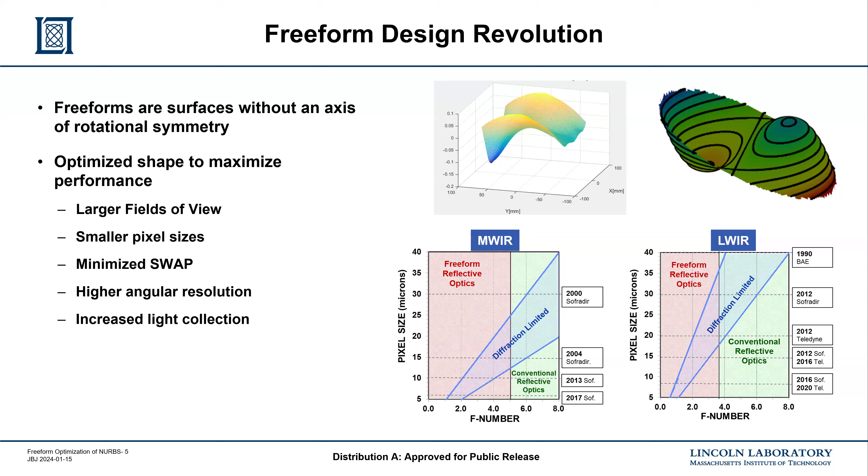So getting to the point of using freeforms requires solving three big challenges. The first, and I won't put these in any specific order because they all have to be solved simultaneously to produce a freeform object, but I'll start with the design because that's usually the first thing that gets done in an optical system anyway.

You need a way of describing what a freeform is. You need a way of translating that into the computer code to actually optimize it. There are too many parameters to do this by hand.

And you then need a way to be able to take that design and actually translate it out to something that's usable by the fabrication tool. You've got to take those surface shapes. These have lost all their symmetry, so your equations get a little messy here.

And now you have to be able to have a machine that can actually create those shapes. So you need to add axes, you need to add encoders, you need to be able to add precision to your tool motion and have the pathing in the tool motion, and know where the pathing is, both in pressure and in stroke speed, all of the fun things you learn working in a polishing shop when you do it by hand, now able to do it over a computer numerically controlled system.

Great, we've got 5-axis machines, we've got 6-axis machines. You could buy 8-axis machines if you want to. Great, we can now fabricate really crazy shapes. You still have to be able to measure them because you have to take those measurements of the surface and then feed it back into the machine. And once you've fed it back into the machine, you know you actually did it right. And then you have to be able to put together your optical system.

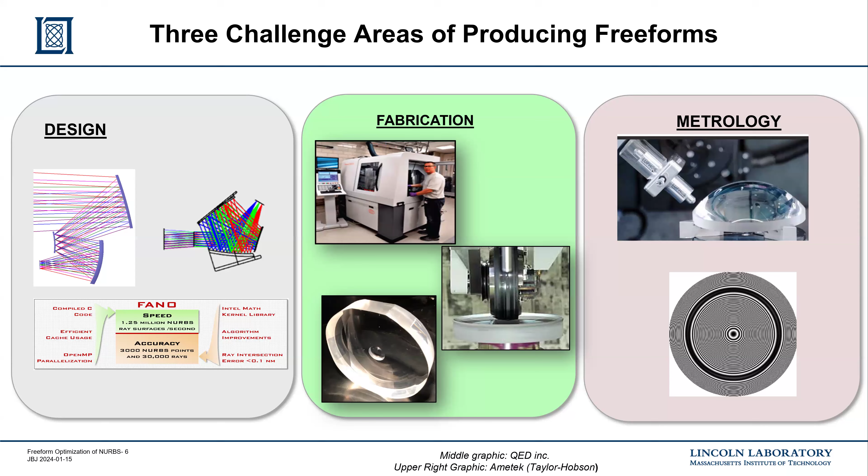Yes, freeforms have been out there. You can find patents of them out and back in the 80s, but it was very hard to fabricate and very, very hard to align, except in really small, limited use cases.

We'll flash through this really quickly. This is kind of how it goes, right? You've got Newton back in the 1600s, great. You get to the parabola, beautiful, perfect spot. Even Newton really didn't have great parabolic telescopes. They were hard to manufacture, right? It took several hundred years to be able to manufacture good parabolas, good conics, good ellipses.

And then the 80s, great, we've got computers now that are doing stuff fast enough, we can start having them drive machines. It means we can start adding more terms, the optimizers can get better. You've gone from a couple of parameters with a kind of constant radius curvature. Now you've got 10 or so parameters per surface. Well, computers now, they're so much better, we can start adding as many parameters as we want, within the limits of whatever the latest Intel CPU is.

And that means we can start having hundreds of open parameters running on the surface to bend and change and shape the mirrors, which means we need equations that can accommodate many, many more terms that are there.

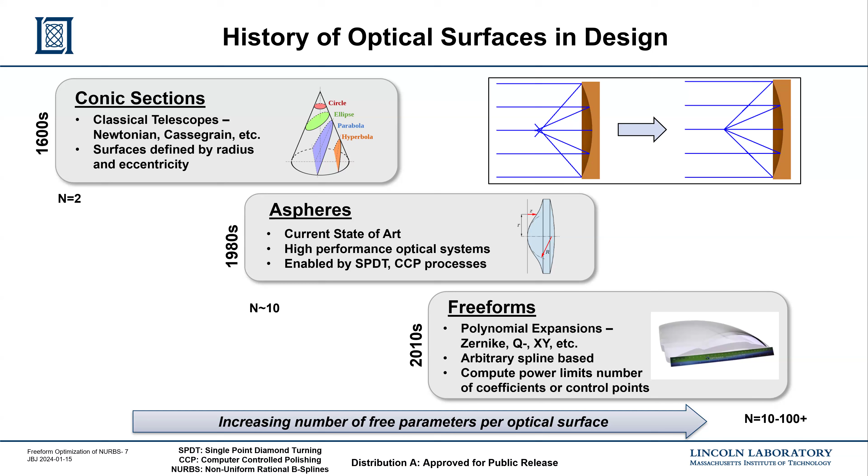So aspheres, I won't spend too long on this. The idea that you've got your core conic equation, your radius curvature, your semi-diameters, and a function that we think of as the base conic, and then we start adding higher order perturbations to the surface, which adds just a little bit of localized bending.

It does become a little degenerate in these descriptions, which is why things like Forbes polynomials, the Q polynomials have come about, so that you don't have terms that start fighting each other while you're optimizing. You don't want to be increasing this number and then finding you have to be tweaking other numbers. It does add some simplicity to the optimization method.

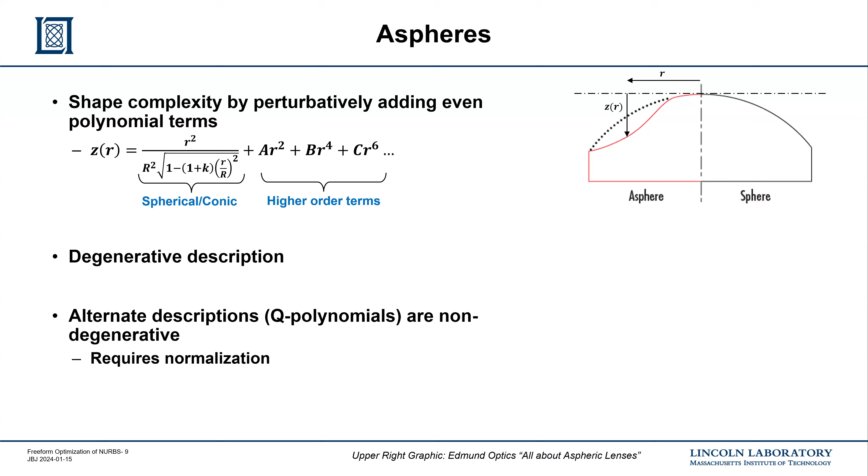And then we get back into the idea of freeforms. Now, what a freeform is, is a little bit contentious. You can ask many people and you get different answers on what exactly constitutes a freeform. There's really two definitions you can select from. The first is there's no axis of rotational symmetry. That one nobody will disagree with. There's a softer definition, I call it a softer definition because you can argue one way or the other, and that is parts that don't have any local axis of rotational symmetry.

I personally argue things like off-axis parabolas that are made without a parent. Instead of making a giant 4-meter off-axis parabola and then coring it out together, you just make it as one little 12-inch off-axis parabola. Everything about making that off-axis parabola as a child on its own uses the exact same processes, tools, and math that a freeform does. It's essentially a freeform altogether.

And we've got many different ways of describing it. You've got your polynomials, you can describe it purely in terms of point clouds, and then this way that Lincoln really works with, splines and NURBS.

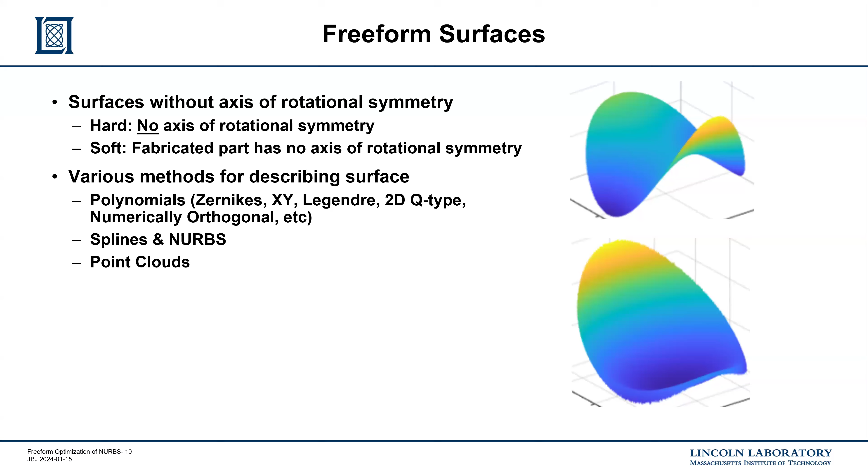So what is really the difference between point clouds? And I'm lumping NURBS and splines in with point clouds, versus polynomials. Polynomials are essentially an analytic equation, a solvable analytic equation. If you enter in an XY coordinate on your mirror, you get a set result. This is great, but that means that when you're optimizing, if you change one term on the mirror, the entire surface shape changes.

So at some point, you get so many terms there, when you open up to more complex surface shapes, small changes mean your entire surface deforms. And now the optimizer actually starts fighting against itself because it wants the mirror to be in position A, but it needs a little more correction in this one small spot over here. And to get it, it has to tweak the entire equation to bring that point down and keep the same spot there.

The nice thing is, if it's a fairly mild surface, you only need a couple of terms. You can do the job very simply. And with everything being orthogonal, it makes everything very easy to describe. You've got a center point on the mirror, you can define your equation from that center point and everything works.

Coordinate transforms can be very easy. And describing that overall shape when you're done, you can put it in a drawing, it's easy to put it in terms that manufacturing and metrology can understand.

Point clouds are a completely different beast. This is where they really work, the idea that instead of changing the entire surface shape, let's just change the localized points. Let's lay a grid down on the surface, describe that, find a way of describing the points in between the main control points that are on the surface, and push and pull up and down locally on it. Keeping the surface continuous, which means it has to be second order differentiable. We have to keep it smooth. We don't tend to like jaggedy optics.

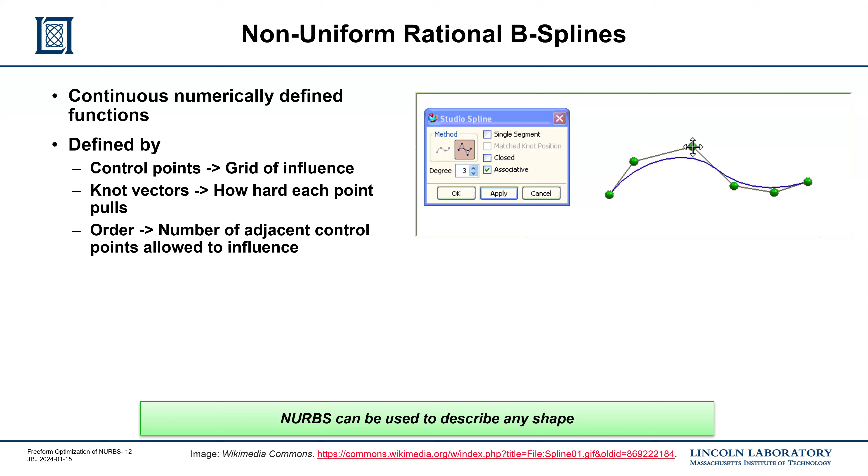And that becomes a big factor with NURBS optimization for raytracing. Ultimately NURBS describe every shape. It's not limited by terms, it's just limited by point cloud density. So we can get to really, really fancy shapes just by manipulating a certain set of properties, and do it faster in many ways than polynomials can for complex systems.

So back a little over a decade now, Michael Crisp, who is still a senior staff member here at the lab, recently mostly retired, developed a method for describing NURBS-based optimization called FANO. You'll hear this a lot, but the acronym doesn't really matter. I think it changes every couple of years when somebody can't remember what it stands for and comes up with something new. FANO is a way of taking an optical system, converting all of the surface shapes to NURBS in a kind of internal global coordinate frame, and uniquely ray tracing. It's a full ray tracing engine, custom designed to then optimize the ideal surface shapes that are in there.

We've spent a couple of years developing a direct GUI connection to Zemax. So we can open it up, it'll take a Zemax file, convert it into the FANO language, spit out a FANO design file that we can then optimize against and iterate in different parameter sets to try and get truly the best shape possible. Then we can actually take it and feed it back into Zemax or Code V to do all of the analysis. That's the nice thing about the API, is that we don't have to build any of the analysis tools in FANO. They already exist in Zemax. Why would we redo what's there?

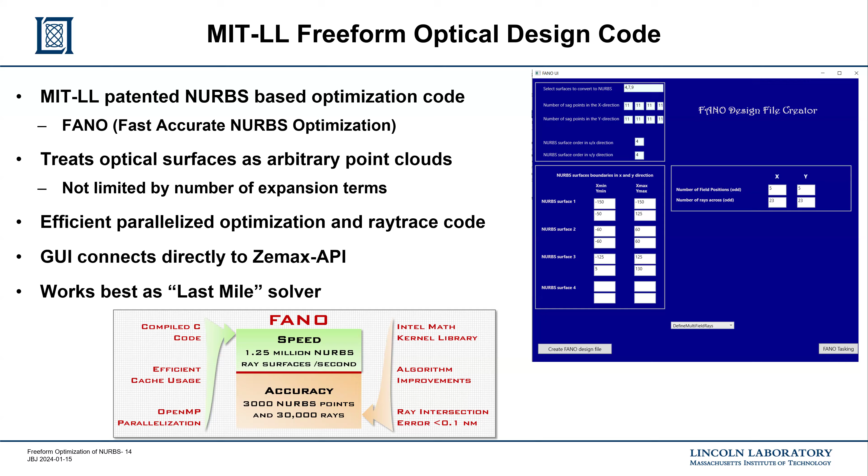Can Zemax ray trace a NURBS surface? Doesn't it need a polynomial? You can enter it as what they call a grid sag surface, so Zemax can trace a third order spline. So it's not a true NURBS. NURBS lets us do some shifting of the points. So FANO will actually re-register and reinterpolate the points back to something that a third order spline will be able to correctly attribute to the surface.

So Lincoln was kind enough a few years back to actually create a video of the FANO process. Let's see, one just here. The idea being you can keep it somewhat real time.

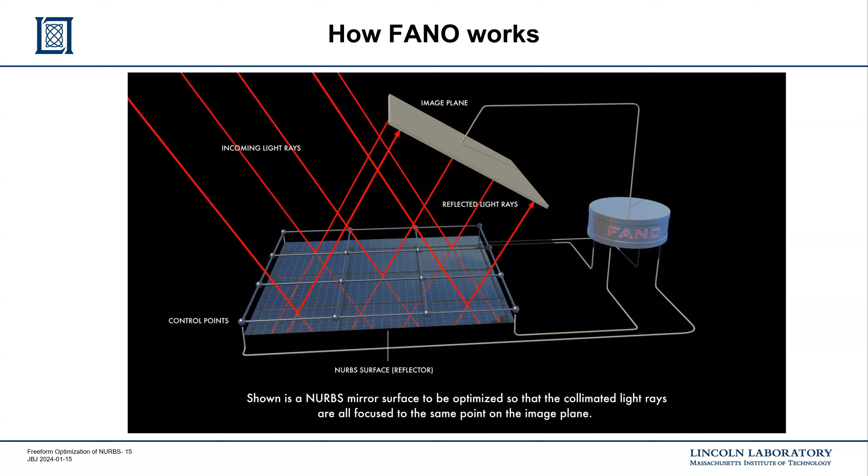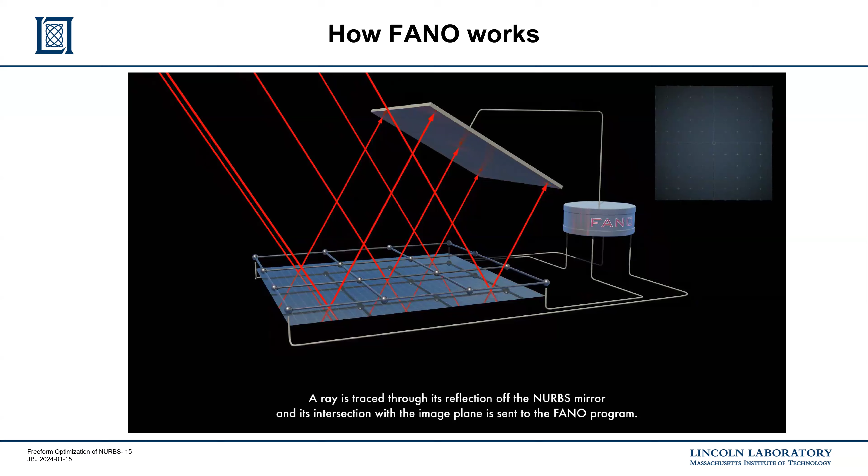You've got your surface, and this is starting flat -- we barely ever start true flats. So your image plane up here has a variety of rays looking at the control points and the FANO solver. FANO goes in, kind of iterates around, figures out how each of those control points influences the rays, and then it starts looking at how to minimize their overall RMS spot size in a sort of direct way where you can see how each control point influences the overall control function for optimization.

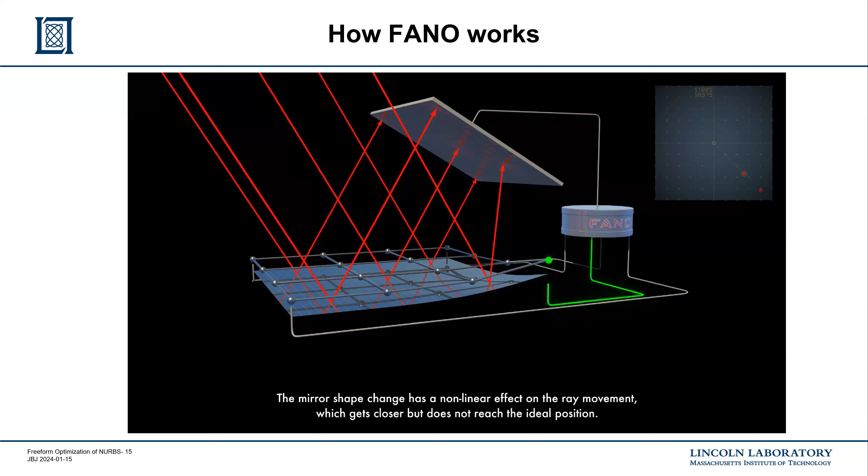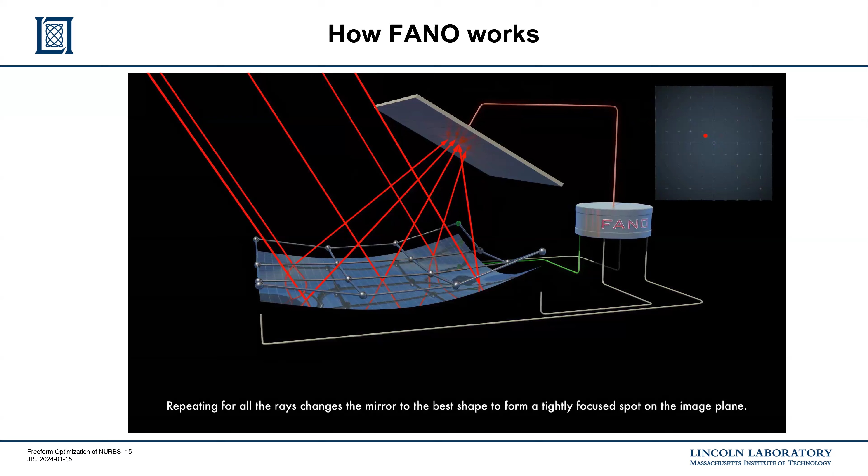I have a question: is the software optimizing the grid density, or is that something defined by the user prior to the analysis? It's very much defined by the user prior to the analysis, and it's part of the art of working with the software that you have to have a density on the surface. You have to at least know where you're starting, because NURBS, where your control point is defined both locally and how hard it's pulling, you just at least give it a basis to start working with.

Adding points is easier to do manually than -- is it always a uniform grid, or do you do non-uniform? You can do non-uniform. There are different user settings we can make while going through the optimization. Uniform grid actually tends to work pretty well, so technically it is a third order spline when the grid is uniform. From experience, it's worked pretty well. There are a couple cases where the non-uniformity can help.

So with that, Michael developed what we call the Freeform demonstrator, which you can see right there. This is his original design to show the power of freeform surfaces, particularly NURBS surfaces. So this is not looking at Zernikes or XY polynomials, this is looking at how NURBS do.

Compared to aspheres, you've got an f2 telescope with a 6 degree by 6 degree square field of view. The conventional aspheric terms out to the 14th order give about a 28 to 30 micron-ish spot size in the visible. You convert all of those surfaces over to NURBS.

You can see the different sampling grids there. Primary is a little more densely sampled than the secondary, same with the tertiary. You get an almost 6x reduction in your spot size. Same telescope volume virtually - I mean a little bit different, but essentially same telescope size, same first order performance, big increase in optical performance.

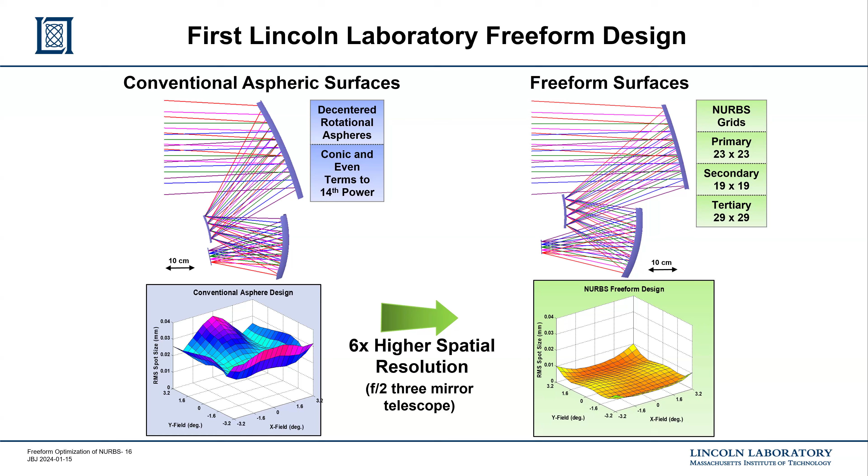So, something about what it's like to align this and actually assemble this - I will get to that. You're telling me it's useful, but now I'm anticipating that it's much more difficult to really assemble. I will definitely make sure I save time for that, because that's actually some of the most interesting stuff we've been doing the last few years.

Demonstrator, as I say, you can see it up there. Most of this is aluminum, nickel-plated mirrors and aluminum housing.

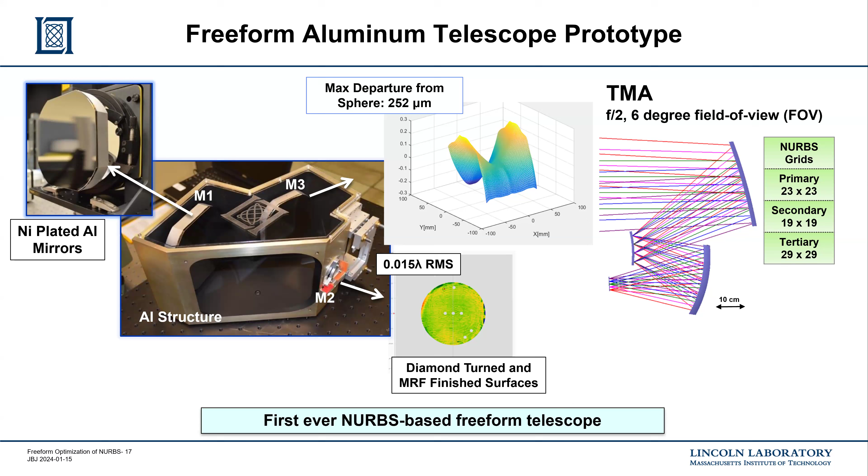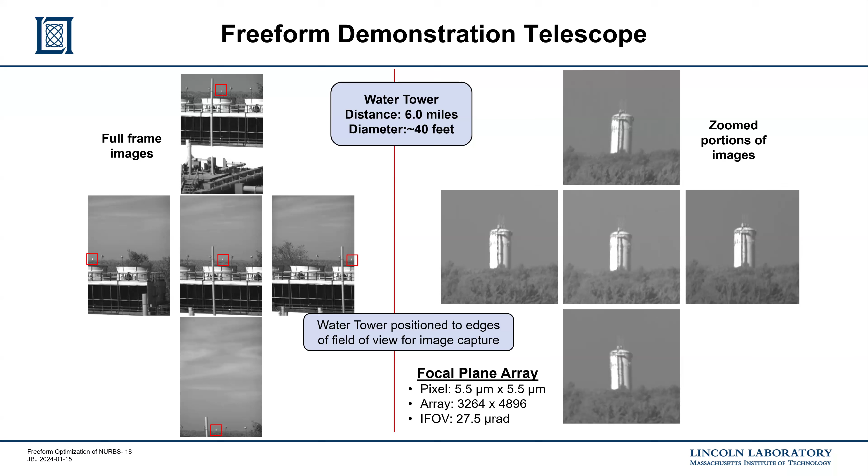So working with Fano, it's kind of about the parameters. Fano's kind of a unique beast to work with. There are a couple strong rules we've developed over the years that you really have to be aware of when you're thinking about designing systems in there.

First is that a lot of parameters are hard to trace. So right now Fano is at least enforcing bilateral symmetry, meaning you've got to have parity left to right. That means we only have to trace half the rays - if it's symmetric left to right, you just say the NURBS surface is going to be the same on the left side as the right side, and you just worry about the half that's there.

You've got this issue of ray aiming. This is a problem with every commercial code - they always struggle if your stop is buried in the back. Code V and Zemax deal with it different ways. We have kind of the same problem because it's homebrew code, we can't really deal with some of the complexities. So we need an entrance pupil somewhere we can directly fire into to make it work. That does kind of limit some of the systems we can do, but even this one, the secondary's at the stop, so we've got tricks we can play to force that entrance pupil out to the front of the system.

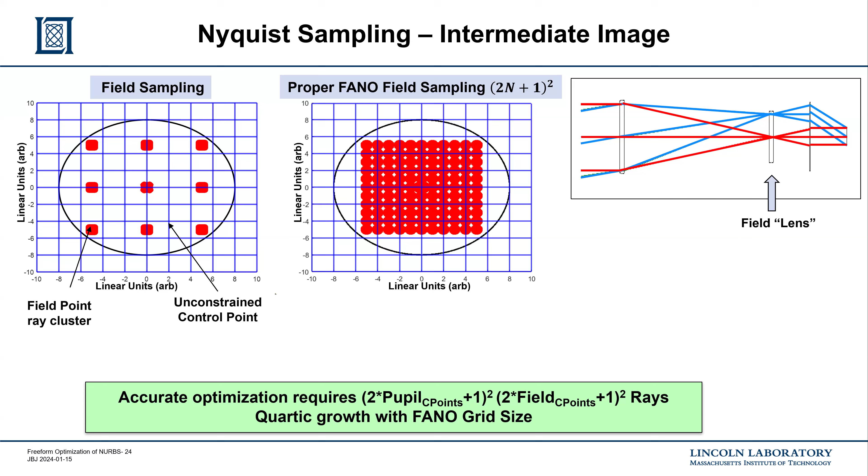So you have to oversample the field to make sure that you've got 2n+1 field points per control point at those surfaces. So you have to really know what's going on in your system, which optics are at field, essentially intermediate images, which ones are at pupils, and which ones are the in-between, and figure out how to balance enough field points to pupil rays in the system. This essentially leads to a quartic growth in the number of rays you have to essentially chase within Fano. So we're tracing a lot of open parameters, we're tracing a lot of rays. It can take a little while, but when it lands on a solution, it's going to be better than anything else that's out there.

I also want to mention boundary conditions, right? Your mirror has a finite size. Your clear aperture cuts off somewhere. No mirror runs to infinity. So we tend to like to trace rays out to the edge of our clear aperture. Great, but again, you run into this ringing effect that's there when you're past that clear aperture.

The other thing is, remember, all of your NURBS points with orders higher than 1 rely on the adjacent points to define the shape, right? The adjacent points are also pushing and pulling on that shape, which means that if you have a control point outside of there, it's going to be affecting the control point that you do want to be working with. So you run into this fact that you start seeing ringing, you start seeing edge ripple, you start seeing bad fits right at the edge of your clear aperture because you don't have rays at that next adjacent control point to tell, hey, that next control point, I need you here so that the control point I really do care about is in the right position. It's one of the limitations of working with NURBS, that the system works on the whole, and you have to understand that sort of interplay between adjacent local optimization points that are in there.

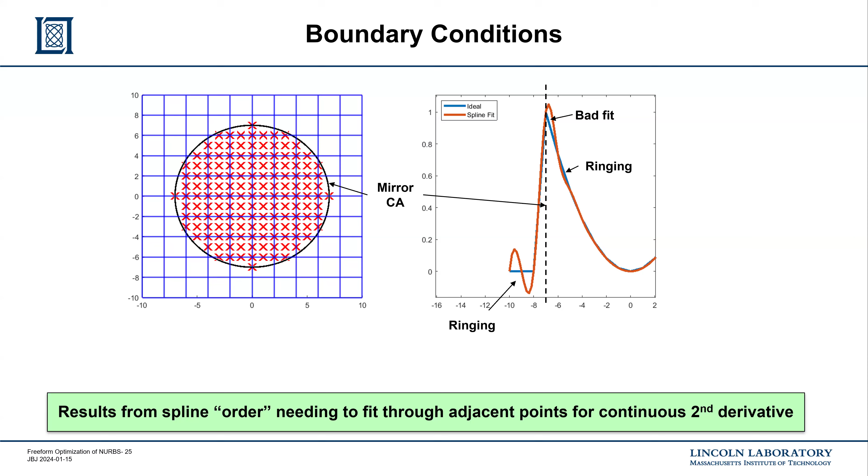We spend a lot of time actually, this is where the art really is. It's figuring out how to balance a lot of these different parameters and understanding that you have to extend how far you have to trace. We have to oversize the system. We have to trace bigger pupils. We have to trace bigger fields. That way we make sure we have rays outside of the control points to control the control points that do lie outside of the mirror, but we want to be able to then achieve much, much better fits to the ideal surface at the point. And then we can just slab the mirror to where we want it, right? Those control points don't exist in the real world because they're outside the clear aperture. So we can optimize to it and then just cut it to where it needs to be.

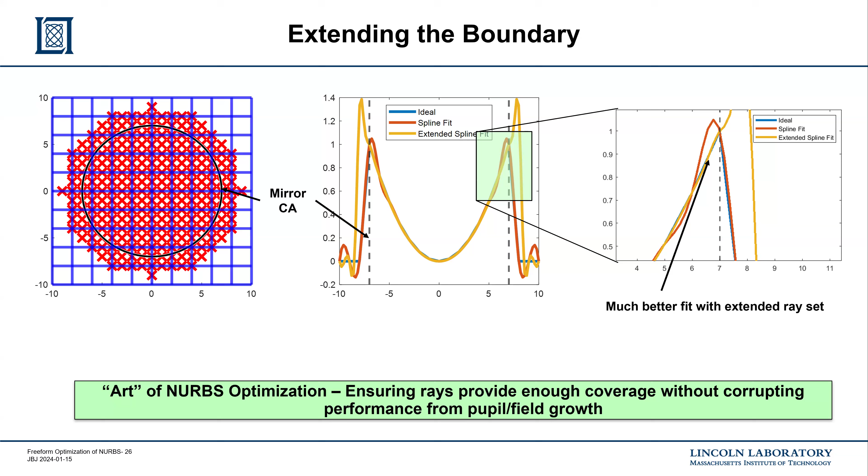All right, so now we're going to get into the practical bit. We've done imaging systems, but I'm really interested in afocal systems. We've got a variety of parameters we're used to chasing when we optimize, generally spot size or wavefront error. We also tend to have a fixed focal length or field of view you're working with.

Afocal works a little differently. You're chasing collimation. You want the flattest wavefront you possibly can for a given field point. And there's usually a magnification factor in there too - how big or small you're making it, how much your angular distribution on the input versus output will be. There's a secondary target you tend to chase in afocal systems, and that's exit pupil. In a lot of cases, you want a physical accessible exit pupil or entrance pupil in the system. This is the exit pupil, because interesting things get put behind it.

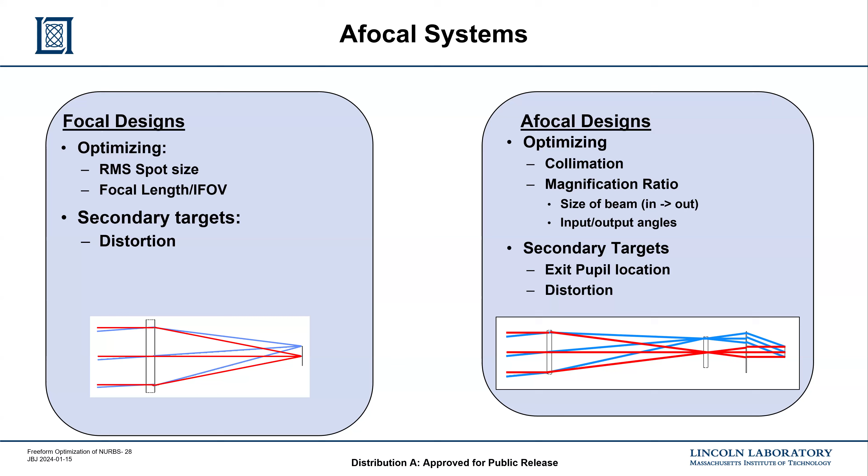The basic first order equations - the real advantage here, and remember, Lincoln is interested in prototypes. We want to build prototypes. With an afocal system, to create an image, you just put an imaging lens at that exit pupil to your camera. But that means now you don't need a prototype system this big to get access to an aperture this big.

You don't have to build a system that is giant to be able to prototype it anymore. If you have a common afocal design with a really nice, well-controlled exit pupil, you could do a lot of really interesting development work and gain advantages of those sort of bigger systems.

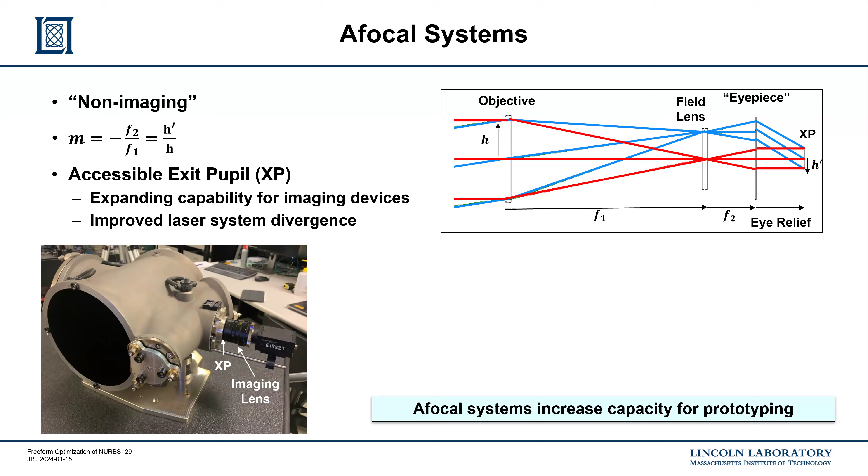However, teaching Fano to go from imaging to non-imaging, that took us a little bit of time to really lock down. The solution proved really simple, but it wasn't really straightforward. We had to work with Michael for a good 6 months to come up with this.

Fano, like most software, chases spot - your X, Y, Z for a given spot. You don't usually worry about Z because it's on an image plane. They all tend to, if it's a flat image plane, have the same Z value. So really it's just trying to minimize your RMS value for a given spot.

But all ray tracing software also tracks what we call direction cosines. These are effectively the angles that the rays are moving through the system. To be able to trace a ray, you need both its position and the angle it's moving, and then the distance it's going to hop to the next move.

So we can look in terms of direction cosines, which the Ray optimizer is already tracking. It's part of the Ray database, and you can pull this down from the database, and Zemax also has this in their optimizers for people to view. Then we can just take that same equation, replace the terms from linear to angular, and try to minimize that RMS value.

This is functional with Zemax and in their engines when you flip on afocal mode, or whatever the afocal system description is there. So we managed to convert the engine to let us switch between imaging and afocal to start doing more of these prototyping, universalish sort of concepts.

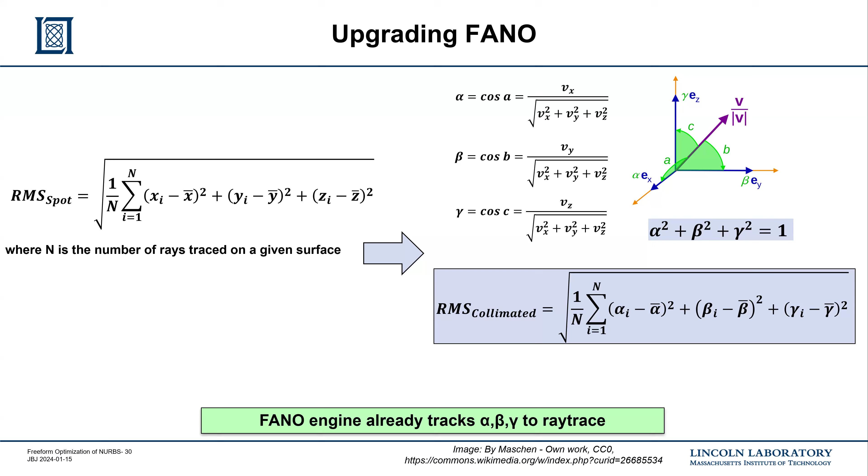And that's where we get to building our next gen freeform telescope, which sadly I couldn't bring today, but we wanted to show what we could do in this sort of afocal space.

So we set out with a concept task to see if we could come up with a plus or minus 2 degree field of view system - so a 4 degree circular field of view telescope with a 6-inch, 150 millimeter entrance pupil and a 6x magnification. And how low a wavefront could we possibly achieve using our sort of NURBS shape?

So we had a notional volume we wanted to be in and a notional weight we wanted to target, but really, again, accessible exit pupil - can we get it to go from 150 down to roughly 1 inch in the back? And maintain a really large field of view.

Remember, most afocal systems are plus or minus half a degree. They won't even stay diffraction limited above that. You can get them to 1 degree, but they're not really high performance out of that plus or minus 1 degree range. So really, how far can we push it and maintain really exquisite performance?

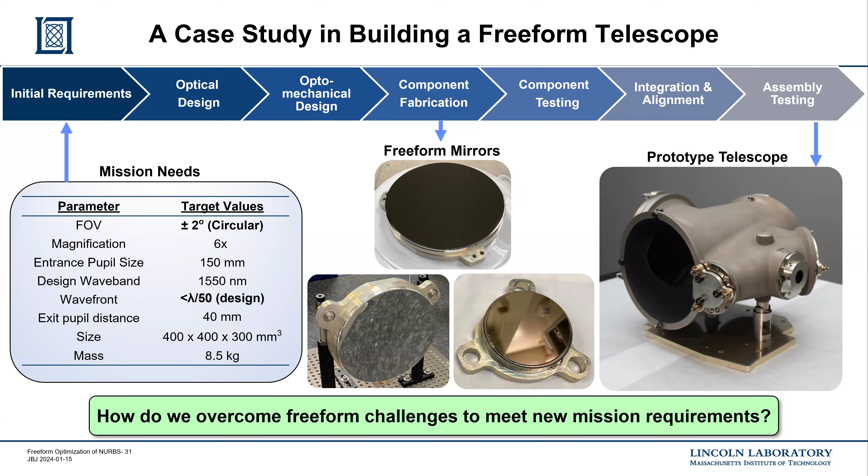So remember, Fano is a last mile solver, so we have to get an initial design. It's not going to know what to do.

Personally, I'm very interested in these ideas of folded TMAs - three mirror anastigmats, where you've got a primary, a secondary, and a tertiary mirror, but you fold it so that it makes this volume more compact because you're essentially running the rays inside the space that's in there. This has been done. There are designs out there, legacy telescopes running with this sort of design concept.

Search all through the literature and find various concepts out there. One of the beauties is you get this nice accessible exit pupil. You can even, if you do it very carefully, though it's hard with systems this fast, get an intermediate image that's accessible, so you can do a really nice field stop to cut down stray light. Doesn't always work when you're going for compact, but it's there.

You'll notice though that the all-asphere design, it's really hard for this sort of field of view, this magnification, this entrance pupil size, to get below about 0.2 of a wave RMS at 1550. So we've got to do better.

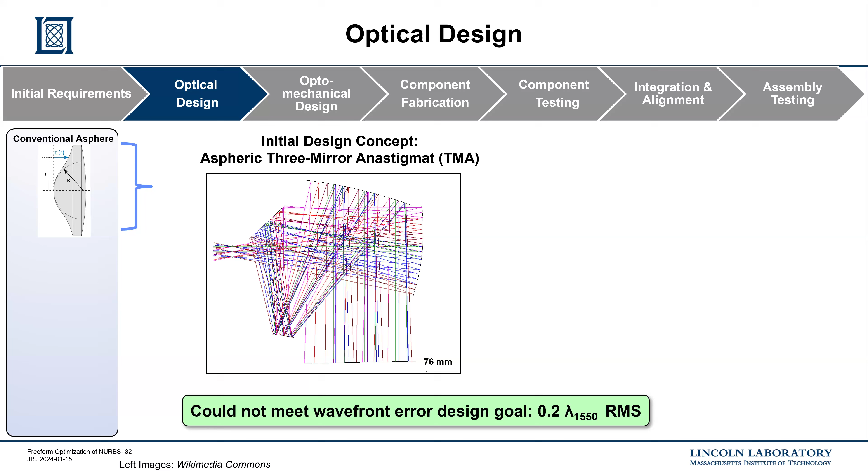Let's go to Zernikes. We can take that design, add Zernikes to all of those aspheres, go back in, re-optimize, select code 5, let Zemax just churn, try to find a really great solution. It's a lot better - good 5 times better than what the all-asphere design was.

We've got a couple high lobes through there, but it's really not getting down to that. Ideally, we want to be starting around a 50th of a wave. So when we start building a system, it's going to be fairly low performance.

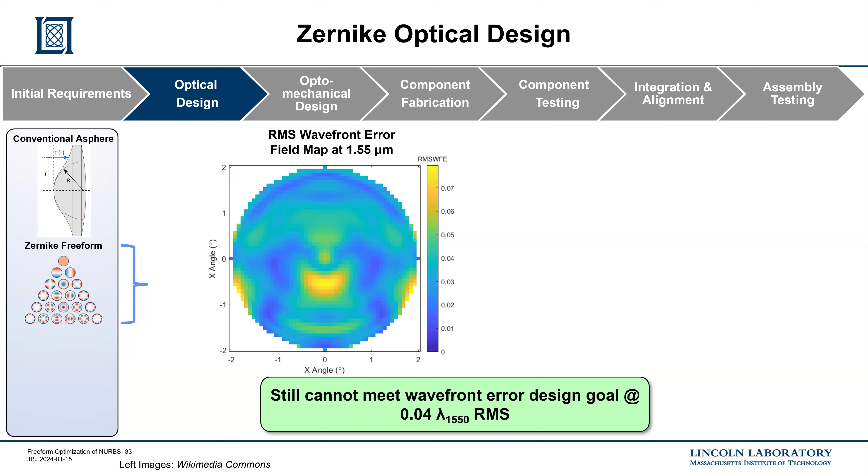So we can convert that now to NURBS, and you can see the difference. I'm going to flip between these two slides here so you can really see - these are on the same scale, right? You can see how much less wavefront error there is across the system.

It still has that folded TMA appearance. The mirrors have not shifted dramatically from more or less where they started, but now we're talking half the performance of what the Zernike was across the field of view. This is less than a 50th of a wave over 97% of the field of view we're talking about.

That's the residual, right? That's where we're starting. So that gives us a lot more buffer to be working with. We have a lot more room to work with when it comes to tolerancing, aligning, and building.

There are a couple papers out there that the lab has published where we talk about the benefits of NURBS versus Zernike versus just asphere. We do tend to find that freeforms are less sensitive than aspheres are in general.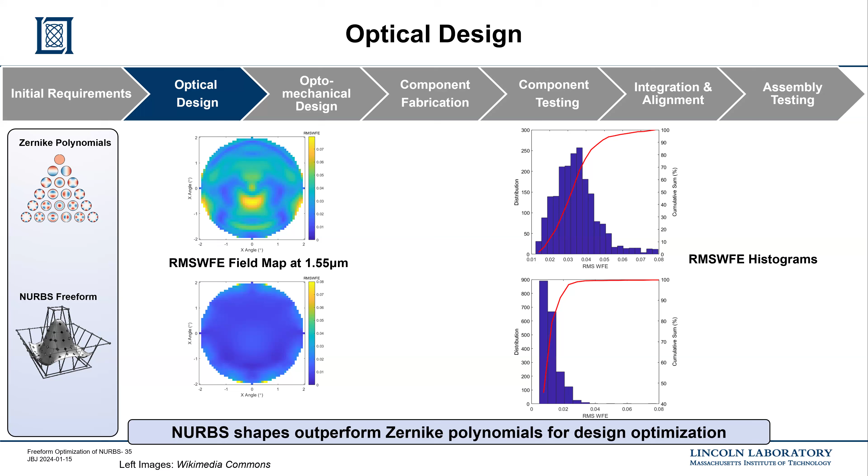So now we've got our design. We've got to figure out how we're going to actually make it, because our sponsor's like, no, we want you to go and actually build and prototype it. Great, we want to build prototypes. That's what we want to do.

So this is where myself and Chris Roll, who's in the audience here, sat down to figure out how we take a really, really beautiful NURBS point cloud design and make it something real. You've got problems, right? We can't do a lot of in-house code.

This is a small rapid prototype program. So we've got to think about how we get the shapes into CAD, how we spread them in CAD, how we get the prescription to line up to datums on mirrors, how we get them to translate so we can convert it to MRF codes, or both MRF code and diamond turning codes, so that the machine knows how to make the shapes. Since we're not talking about polynomials, these aren't embedded descriptors in the normal CAM software that the machines are using. And then, of course, the same problem getting into the metrology - how do we do it for metrology?

The biggest challenge with freeforms is coordinate frames. I will harp on this the rest of the night. Coordinate frames, they are the hardest thing we deal with.

Chris and I have spent so many hours in meetings discussing where on earth the coordinate frames sit, because the mirrors are all in local coordinate frames. They don't care about global datums. To build a system, though, you need a global datum somewhere. You have to say this is the truth, and the local coordinate frames also where the surface is, not where the mirror is, like the physical mirror is.

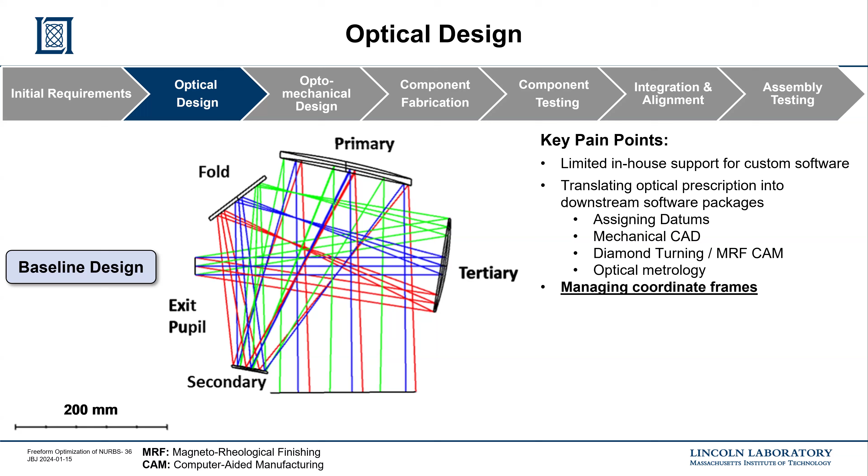So coordinate frames become a real hassle, and a lot of time is spent developing ways of describing them and making sure that they translate and travel properly, and you don't lose fidelity as you have to switch from one global coordinate frame or one local coordinate frame to another. Every time you interpolate, you risk degrading the quality of your system.

Chris did a fabulous job with this optomechanical design. We've got our mirrors, the aluminum with nickel plated surfaces, and our sort of contoured housing that we came up with. And then we started thinking about how do we do this right.

Part of working with freeforms is you need a lot of really good fiducials. You can never have enough fiducials in your system. If you want to measure something, it's got to be put in before it's actually manufactured. So if you do too many, not a problem, you probably won't use it, but fine. If you really end up needing something, you don't want to end up needing it after it's made and you can't have it.

So the mirrors all have precision clocking features. They've got precision mounting points. We have places where we can manipulate each one in 6 degrees of freedom. We also include features like pockets in the back of the mirror where we can mount SMRs so that we can see relative to a CMM or a laser tracker where the mirrors sit.

We also take advantage of another technology developed at the lab, something called the ARRK mount, the adjustable relocking ruggedized kinematic actuator. This is a little piece of technology developed at the lab 3 or 4 years back that is a vibration and sag insensitive actuator. It has a way for us to quickly unlatch the system and be able to turn it like a normal Newport or Thorlabs, Mitutoyo type actuator system to make very precision measurements.

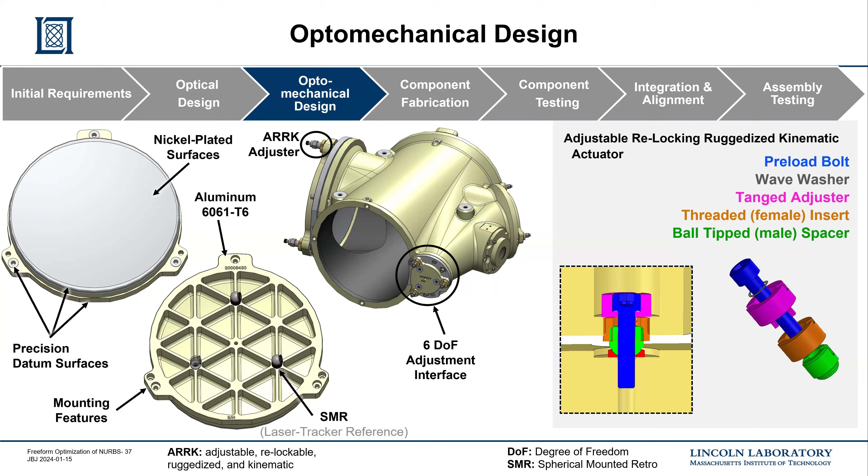Everything was fabbed in-house, except for the 3D printed housing. Mirrors start off rough, they go into diamond turning, then they get essentially iterated on over there in our diamond turning facility.

Again, data interpolation, big issue, right? How do you translate the point clouds from the NURBS space to the CAD space, which is also NURBS, but you want to make sure it's got the exact same formatting in SolidWorks that it did in Zemax, and then make it over to CAM software so that DiffSys or whatever tool you're using to program your diamond turning machine is following the exact same tool path needed to recreate that surface.

These are non-rotationally symmetric surfaces, and it's spinning the part along a spindle axis. You got to make sure things are really, really right, especially over repeated cuts to further refine the surface. Coordinate frames, it all really comes back again to coordinate frames. And of course, we have the usual issues of mount-induced error, getting on the chuck, making sure the surface doesn't bend. A lot of the fiddly things that come with any sort of high precision polishing or manufacturing of optics.

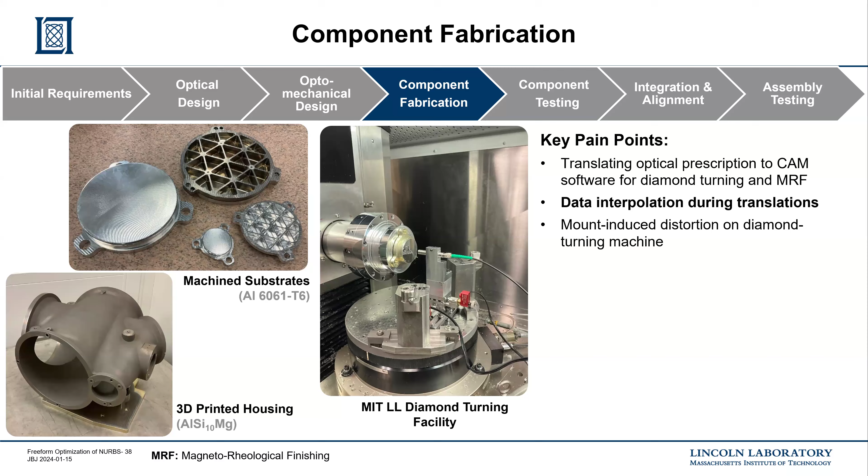Of course, same thing with metrology. We are very, very fortunate to have access to a LuphoScan non-contact profilometer.

This makes the job a lot easier because we can take our point cloud, feed it into the system, and be able to then take fairly high resolution images of the surface to get the figure to the resolutions we want to see. So we can see the mid-spatial ripple, we can see the cutting errors, and then feed that back into the diamond turning machine, iterate until we get to the sort of performance we want.

Ultimately, we did send the mirrors out to be MRF'd so that we could really refine the performance down where we want, beyond what the diamond turning machine could achieve. But still, it gives us an idea of being able to quickly iterate on and then verify once it got back from MRF, how well the mirrors work.

Once they're done, they go up on the CMM, they get measured against our laser tracker. That way we know, because our housing's got laser tracker fiducials all over it, and the mirrors have laser tracking SMRs all over it. That means we can position the mirrors to the housing within about 25 microns of ideal position. And that's a great starting point.

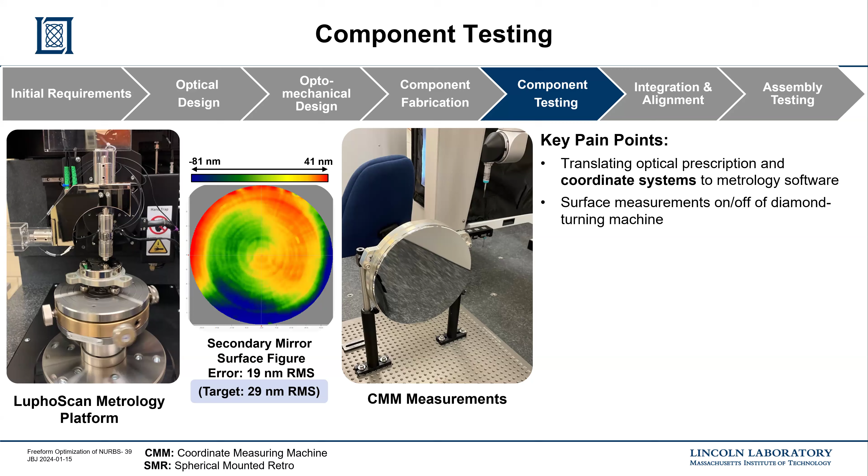That's a fantastic starting point. So then we have to put the system together and align it. The question was earlier, how do you align it? Well, this is really where the challenge is.

When you think of alignment, it's a sequential process. You start with your housing, you get it all nicely lined up. You put your primary in, you do all your metrology, get your primary lined up. Then you put the next mirror in. You have all your metrology set up to get that next mirror in with the 2-mirror system in the ideal position. And you have the next optic, and you keep going down the chain until your system's fully aligned. Great. It takes time. It's not really an ideal process for complex prototypes.

We have these added complexities of all of these mirrors having 6 degrees of freedom, plus the stop that we have to position, plus the housing we have to position. So we were looking at potentially 6 different holograms to build this. Some way of getting coordinate frames of all of these adjusters to directly map the motions we wanted to make, to be able to feed into actually how to process the system. It was daunting, and honestly, for a quick turn, low cost prototype, it was going to be extremely expensive. It was going to be about 1/3 of our budget to really properly metrology the system out.

So we sat down and were like, we need to do this a better way. And really, when we were thinking about the way we wanted to do it, we thought: well, why can't we just move all the mirrors at once? Just put them in, get it done, move them all at once. Well, first you've got to get them really close.

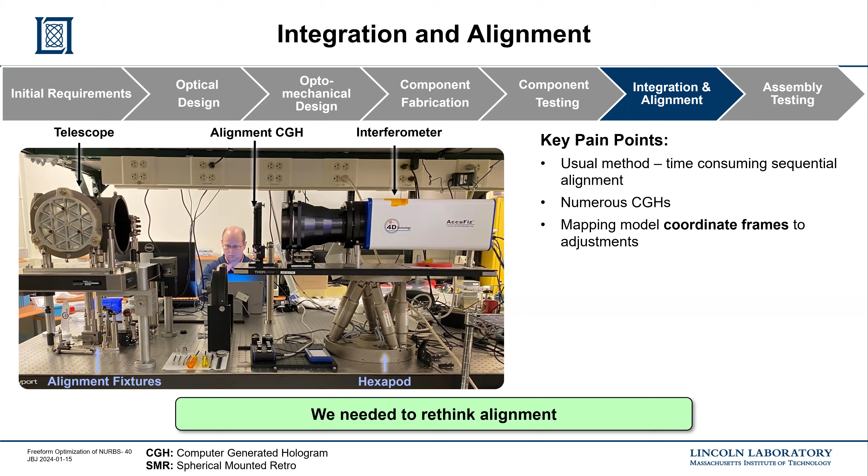So let's go with this idea. Let's try to move all of the mirrors at once. So laser tracker gets there. And how good does the laser tracker do? It does really well. First light, and literally this is our first light image.

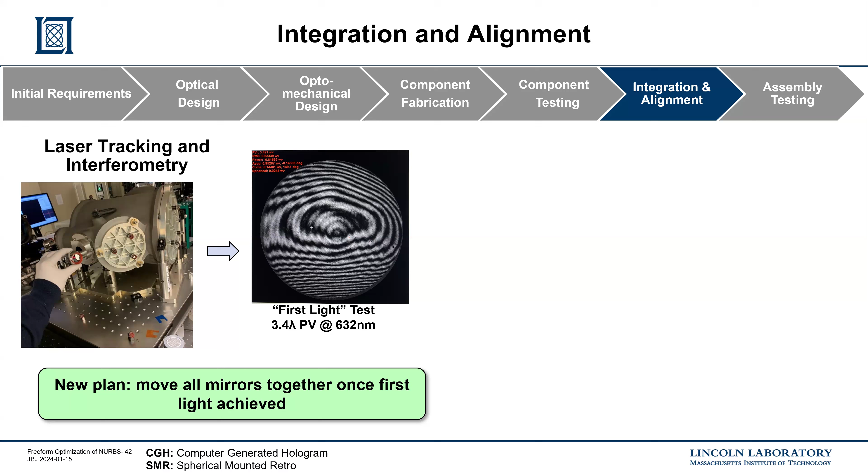We did not try to put the interferometer through before this shot. 3.4 waves, peak to valley. We've got fringes. We don't see any aliasing. We are close, right? I mean, it's not good enough to sell it off, but we are close. You can definitely see the mid-spatial. This is pre-MRFing the mirrors.

So this is a complex off-axis system. We need to get off-axis field points. We can select just a couple of field points to measure, take a handful of measurements. Now we get a sense of our off-axis aberrations and our on-axis aberrations. And that gives us something that's there.

And then the real brilliance was we went in and calibrated each actuator. We set it up and moved it just a little bit. We took each one and moved it 1/8 of a turn, and did that just far enough until the wavefront fell off.

And said, okay, let's assume everything in this world is linear. It's probably a good assumption that over small motions, things are linear. They tend to be. Let's just see what that linear motion is, and we mapped each actuator to the system.

Now, when we go and take a measurement, we can feed it into what amounted to - and we didn't realize this till after the fact - a Monte Carlo machine learning solver. We can feed in those actuator motions, that linear motion, and just start firing solutions. If we move the actuators this much based on where we start, what would the expected output be?

And you can run 1 billion simulations in about 5 minutes on a laptop. So honestly, the measurements take about 30 minutes to take, and the laptop generates something in 5 minutes for us to be ready to move.

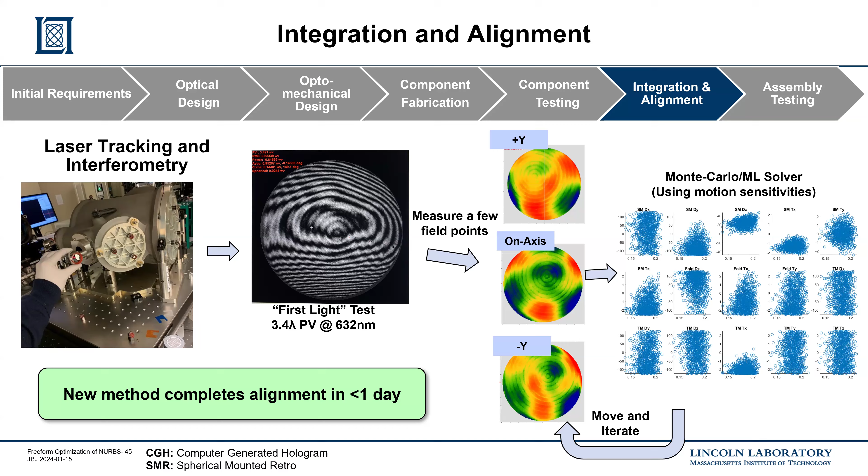In the end, honestly, we can align the whole telescope from mirrors out to put in about 5-ish hours. We've gotten it as good as 2 iterations - that was pretty lucky - but it's somewhere between 3 and 5 iterations of the system to bring it down from 3.4 waves to, well, right there. Fully built, it's around 0.036, 0.04 waves across the field of view. We hit pretty much every one of our specs except field of view in the system. And the performance is phenomenal.

The one thing you mentioned early on was the 3D printing of this housing.

That's one of the nice things about having the diamond turning machine - we can take it 3D printed, then send it over to the diamond turning machine and cut all of our pads flat. Put it up on all the same precision metrology we use to cut the mirrors and make sure everything's nice and square, stress-free, and that helps bring everything together. Similarly, the pads on the mirrors that come with the diamond turning machine are all very plain. Great performance.

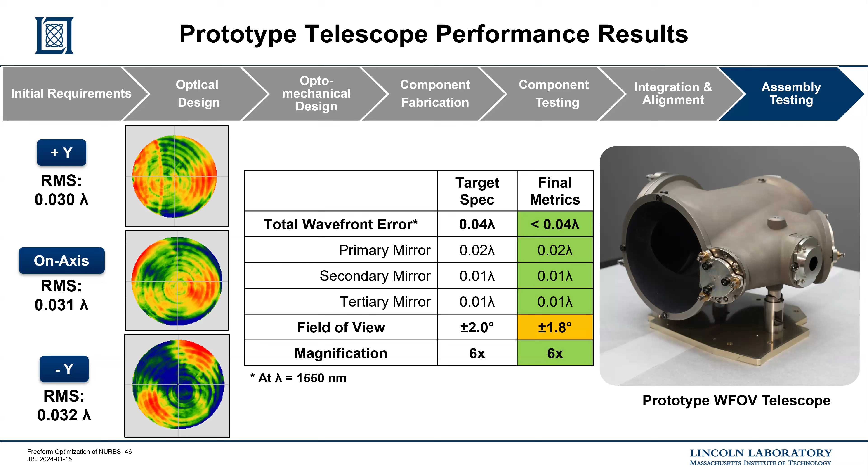I'm going to come back to this though. That field of view really bothered us. We were like, why is this so good and we don't have the field of view? The answer is, annoyingly enough, boundary conditions. We missed this, and it galls me - I see that mirror, that's all I can see. But if you look really carefully at the very edge, there's a couple of high points. If you look even more carefully, that blue, there's a ripple there, and it gets lost when you're looking at your computer screen until you blow it up to the size of a room.

We didn't notice until it got to diamond turning, and the computer code sent back to us what the toolpath shape was. Our diamond turning engineer, Dimitri, was like, there's this crazy ripple around the outside of the mirror, and the tool can't move in and out fast enough while it's moving. We're going to have to change the parameters. And we're like, well, what's going on? And it's that boundary problem.

We hadn't pulled the ray grid far enough out when we did the prototype. We thought we had, and even there, because remember, it's a third order spline fit, which meant that the control points were still slightly influencing it, even though it wasn't quite far enough out to get rid of that. We've since gone back and reiterated on it to correct this problem. Now that we know it was there, we could build a tool to actually go in and detect this and make sure it doesn't happen again in future models. It's a great lesson learned that says, man, it's a complex system, and things you don't think are influencing, or things you think you've controlled, can still affect the performance.

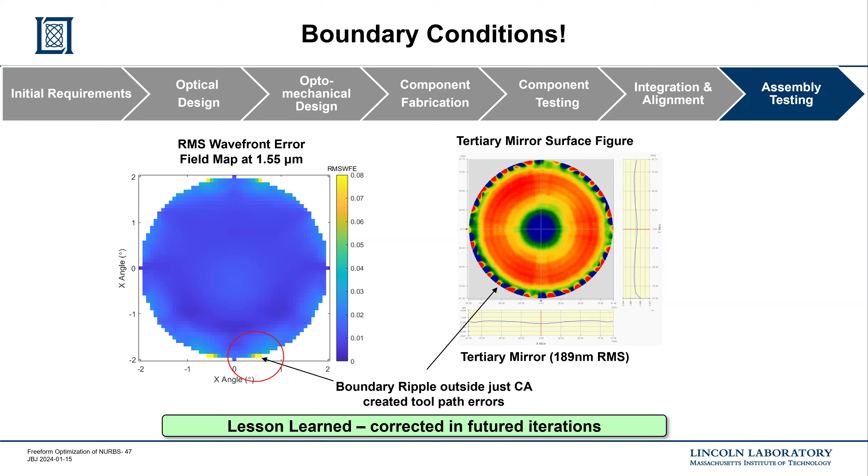So it's a trade-off, right? I can get 0.04 waves across a massive field of view. It's a complex thing if you're not looking at those small details throughout.

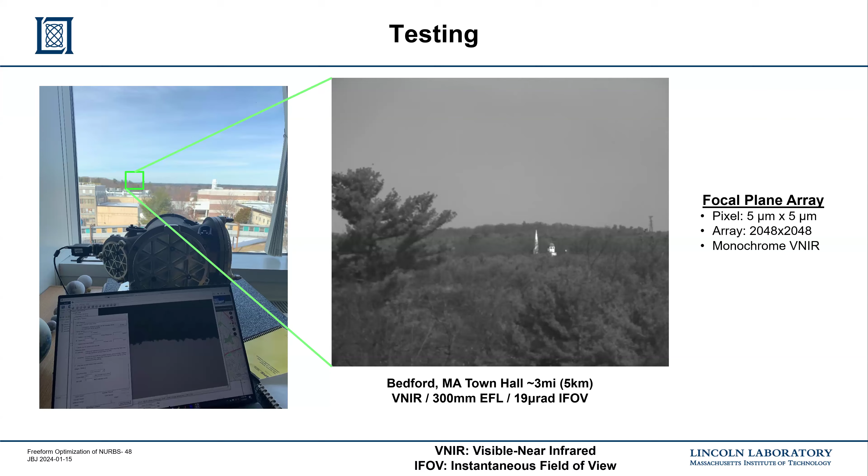Of course, we gotta go take pictures, right? What's the point of building a prototype camera? We grabbed an off-the-shelf lens, off-the-shelf focal plane, threw it on. Again, did a little bit of guerrilla testing and took over a senior staff's office while he was out on vacation, and started imaging all the fun stuff around the lab. You see Bedford Town Hall there, a couple miles away. Same water tower - it took us a while to find a good spot where we could image it.

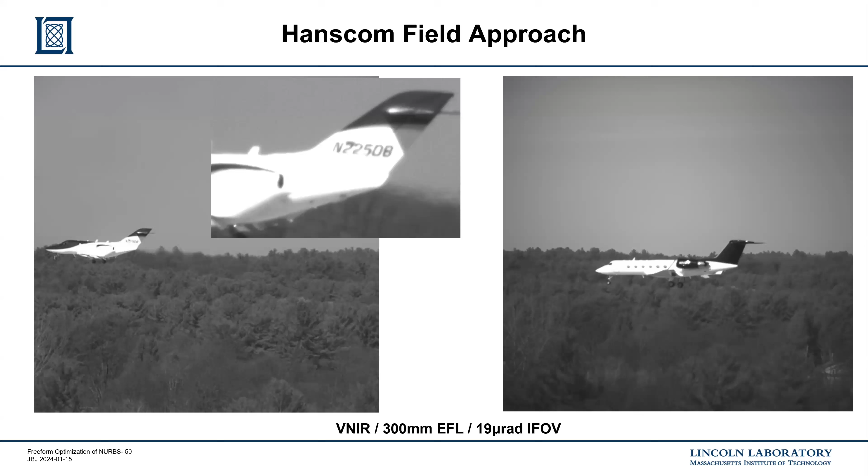You can see different fields of view. We can swap lenses and get different resolutions, different qualities, but you can see the same sort of features with different F numbers and focal lengths. And of course, we're right next to the flight path of Hanscom, so targets of opportunity are always there, and it's really fun when we can actually catch a plane and pick off tail numbers as they're going by.

So, wrapping up - Freeforms, they've come a long way in just a few years. They are getting really practical. They are really worthwhile if your system is worth supporting it, because you do see a lot of benefits. Now, not all systems support Freeforms, and not all systems need Freeforms. It's not something you should just throw at an optical system just because it's buzzy or it sounds like it'll improve it. They add complexity, they can add cost. It's not a panacea.

But when you really need to push, especially off-axis systems, to lower SWaP and higher performance, it's really, really hard to beat a Freeform in that system, either as all of the mirrors or even selectively used throughout the design. And I will stand by this: NURBS cannot be beat for performance. On milder systems you can get the same level of performance, but the more complex the system gets, you need better representations of the surface. At least in commercial code, there are not enough polynomial terms to let you get to the surface shapes you want. So having a way to represent the perfect surface, NURBS essentially lets us jump all of that problem of going and custom adding an even more complex equation to the system - it's baked into the numerical solution of NURBS itself.

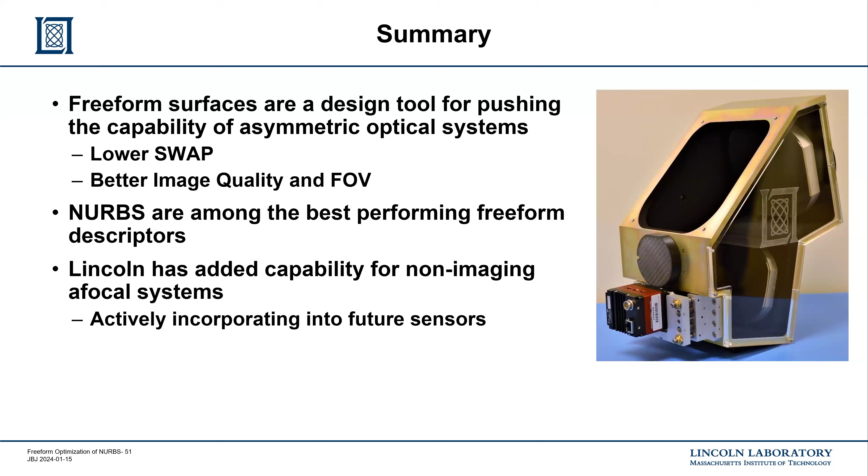So I would like to first thank everybody who's been working on the Freeform project over the years, especially Chris, who's in the audience here.

And obviously Josh Brown is not here tonight, but I want to thank Josh because Josh was very much a part of this while he was here at the lab in developing a lot of this, especially some of the early developments of the math around the boundary condition problem. Josh was one of the first people to actually recognize that the boundary condition was a serious issue that we had to contend with, and sort of laid the groundwork for us to dive more into what's going on.

So we'll take it back to questions. I went a little long, I'm sorry.